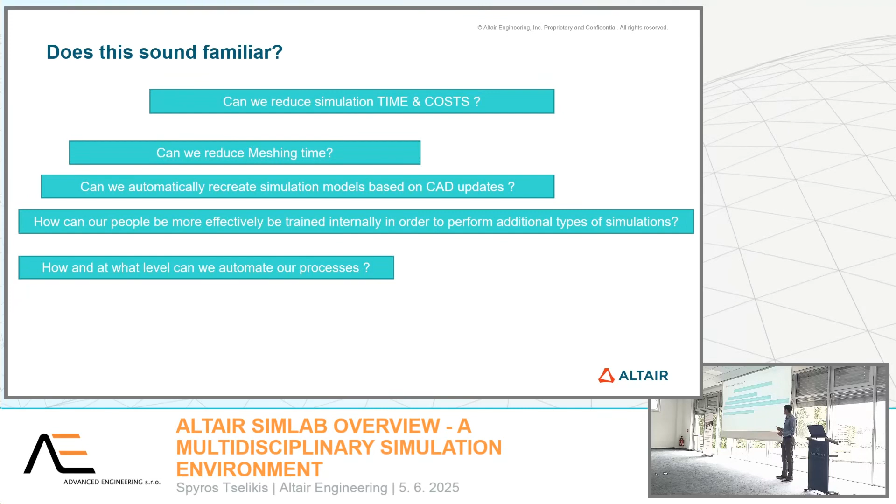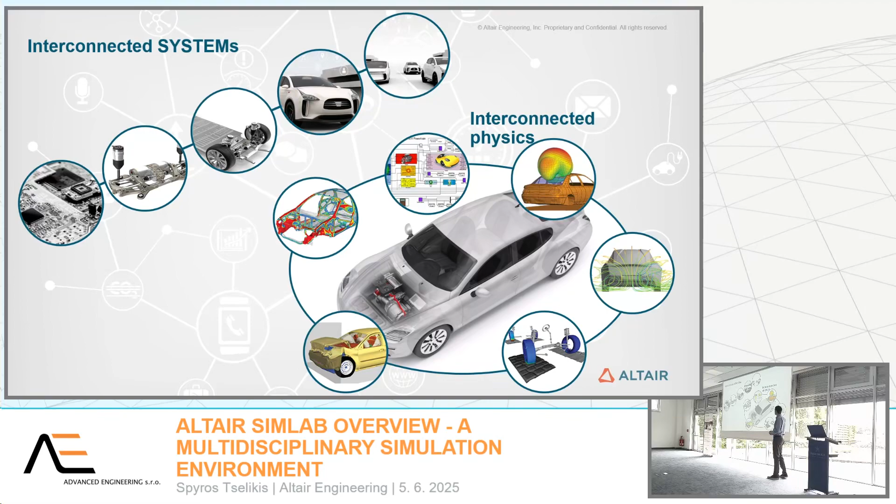So let's check the bigger picture of multi-physics. Today, the products are becoming more and more complicated, with interconnected systems which affect the performance of each other and have to be studied and analyzed individually. So in this system, not only systems are interconnected, but also physics, and all the multiple physics phenomena involved in a system have to be analyzed and studied in order for a complete understanding of the whole picture to be feasible. So let's look at some examples to see what exactly we are talking about.

First, let's consider this simple piping system where hot gas is inserted from the inlet at the top and runs through the pipes to the outlets at the left and right. There's a flange where it connects the two parts of the piping system, and also a weld placed at the T-junction of the system. And as you can see, in such a simplistic model, multiple physics are involved.

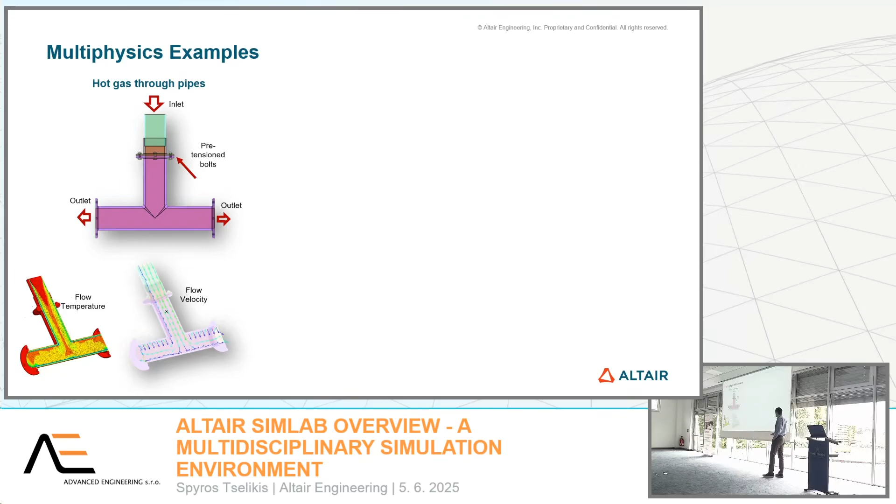So when it comes to this, an engineer has to calculate the flow temperature and the flow velocity and use them as input loads on the pipes, and based on those loads, the stresses can be calculated, and fatigue analysis on the piping system can be performed in order to evaluate the life of the piping system.

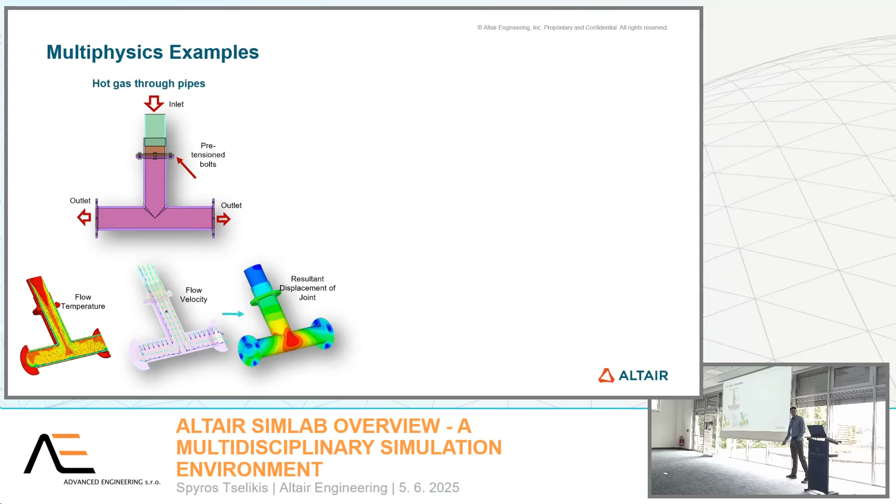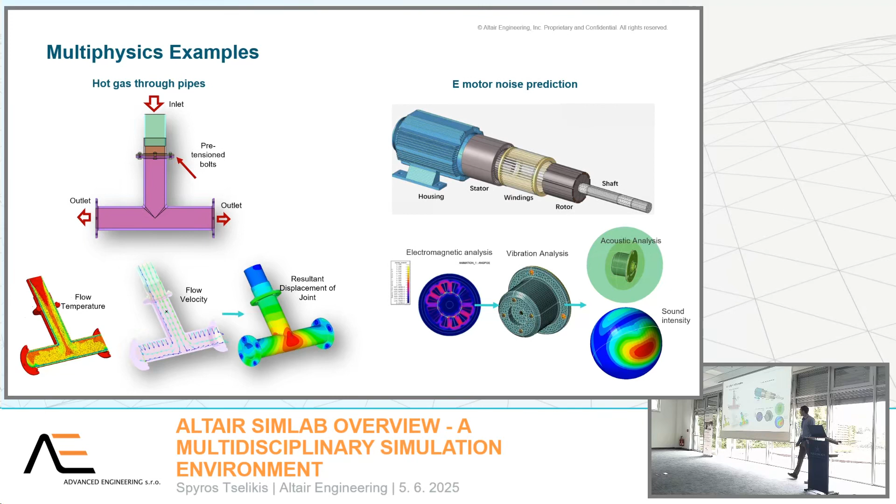And let's take an even more complicated example, closer to a real engineering use case. When it comes to an e-motor, an electromagnetic transient analysis is required in order to calculate all the forces in each tooth of the stator, which in turn can be used in a frequency response analysis. And based on this FRF analysis, acoustic responses far from the motor itself are calculated.

And let's check a real use case: the Nolato self-injector. We can see here the multidisciplinary development of the self-injector, which Nolato collaboratively developed with many companies, including Altair. The development cycle considers many aspects together, like the co-simulation of the injection process, the misuse in case of bending or opening of the loading tray, the manufacturability of the molded parts, and the optimization of the ribs.

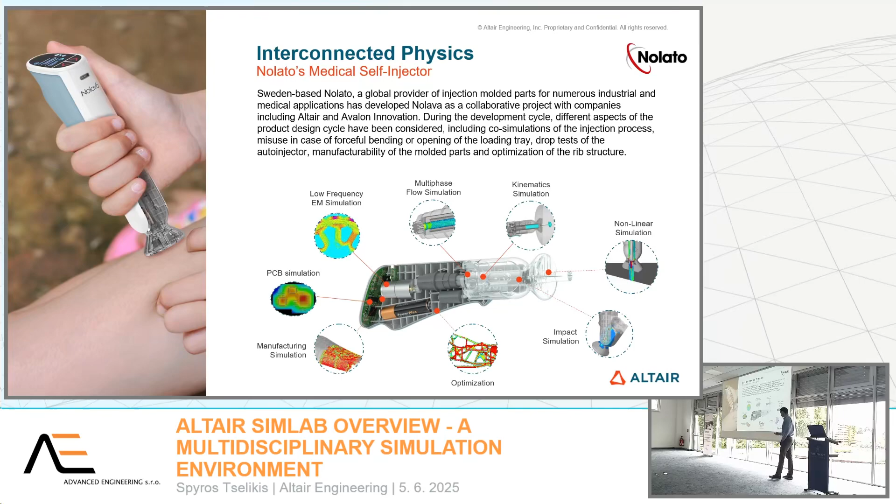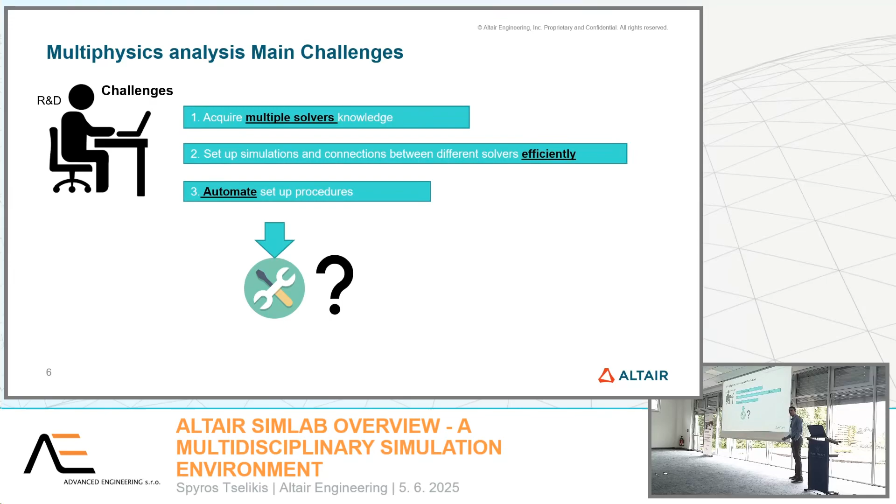So before we jump into SimLab, I want to summarize the main challenges while we are trying to tackle multi-physics analysis. First of all, we have to acquire multiple solvers, and we have to find an efficient way to connect them to each other. And of course, automate all these processes. So based upon these challenges, we have a pretty reasonable question: is there a tool that can help us overcome these challenges? And our answer to this is SimLab.

So if you wonder what SimLab is, it's a single multidisciplinary development environment. This means that it integrates pre-processing, solving, and post-processing in a single graphical user interface and enables us to easily and efficiently set up multiphysics analysis. SimLab was designed upon three main pillars: multiphysics support, user-friendliness, and automation. Each pillar is meant to help us overcome the previous challenges of multiphysics analysis. So from now on, we will try to explain each one of these pillars.

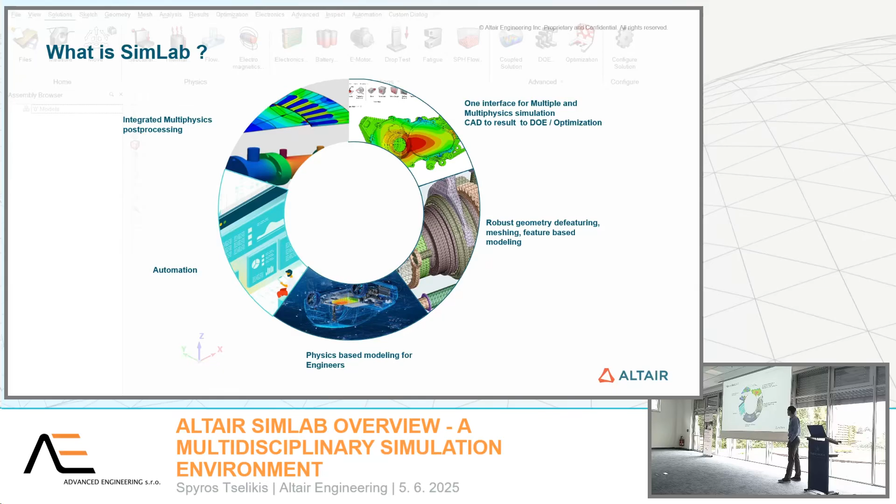First of all, let's begin with multiphysics support. When it comes to multiphysics, SimLab supports structural, CFD, thermal, electromagnetics, as well as coupling of those solutions. And upon that, we have implemented some dedicated tools that help us set up common use cases among the industries, like drop test, PCBs, thermal management, solder fatigue, e-motor acoustics, battery, and so on.

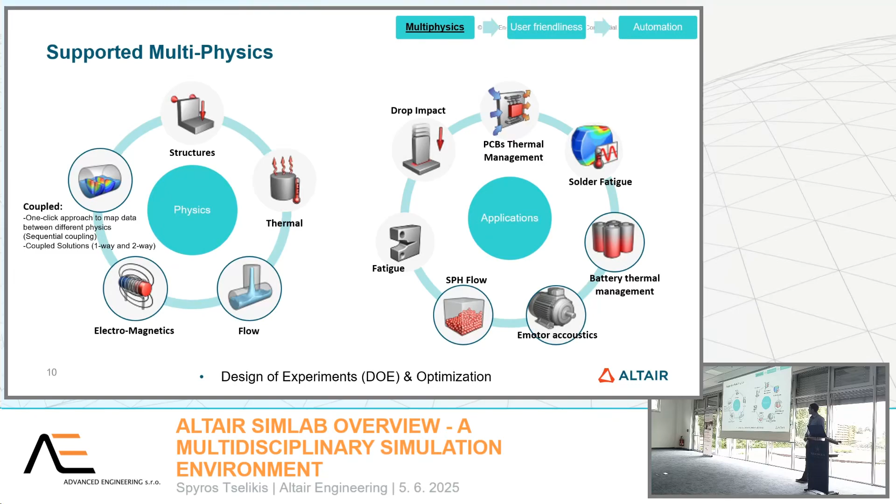Some typical application and simulation types for structural would be linear and non-linear static and dynamics, NVH, impact, durability, structural. For thermal, we have conduction, convection, and radiation. And of course, we can couple those two, structural and thermal.

For electromagnetics, as we saw, we have e-motors, PCBA reliability and electronic thermal management. And for fluids, we have fluid structural interaction, multi-phase flows optimization, and coupling with discrete element method softwares.

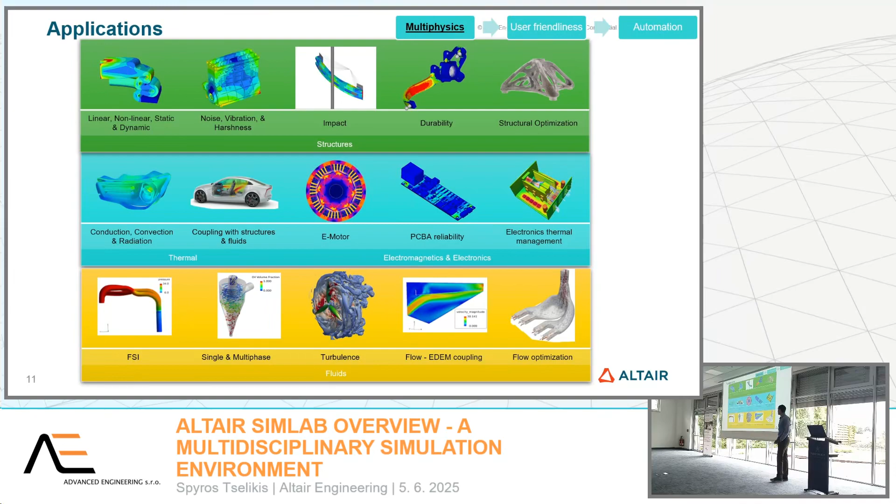And as Panos said, optimization has been a part of our DNA for around 35 years, so it would be unfair not to dedicate 2 slides to show you how you can use our optimization tools through SimLab. At a high level, we may say that in SimLab, we fully support 2 types of optimization: topology and shape optimization. And of course, as Panos indicated before, we have plenty more optimization tools in our portfolio.

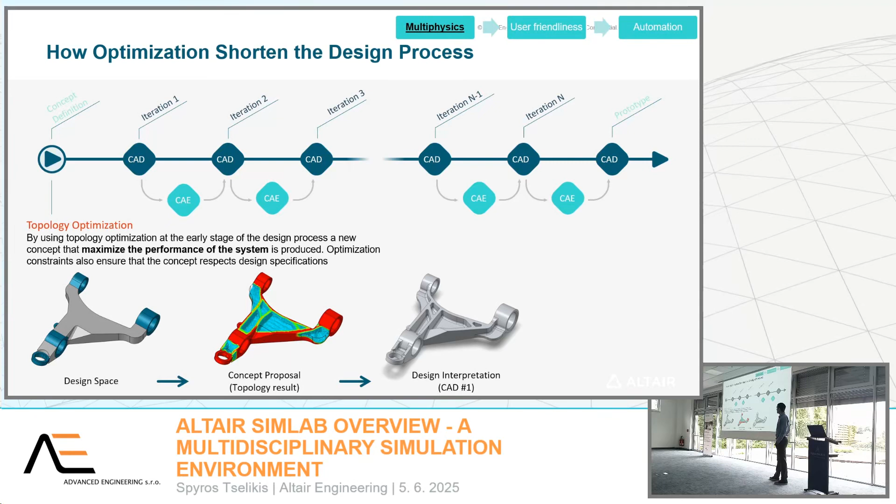To begin with, topology optimization helps us get a good idea about the optimal loading path and eliminate the unnecessary materials at areas that are out of our interest. And this can really reduce our development cycle and get a good performance and a good idea on a starting design. And of course, all of this topology optimization is fully supported in SimLab and can be very easily set up.

And for shape optimization, free shape optimization is a fine-tuning optimization algorithm and helps us get the right geometry and the right shape of our component. Here we see the component that was previously developed by topology optimization and how we can get the exact radius of the fillet in the area with the highest stress. Because when we try to optimize our component, we provide to the algorithm our criteria, such as reducing the stress peaks.

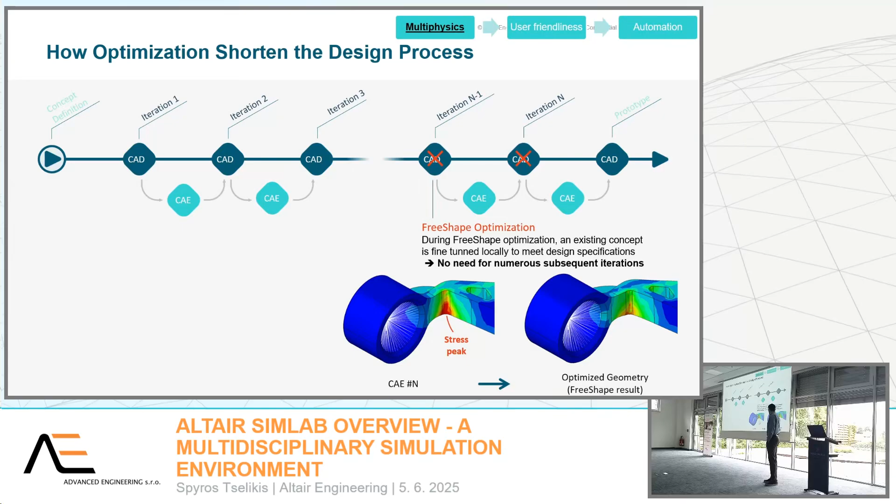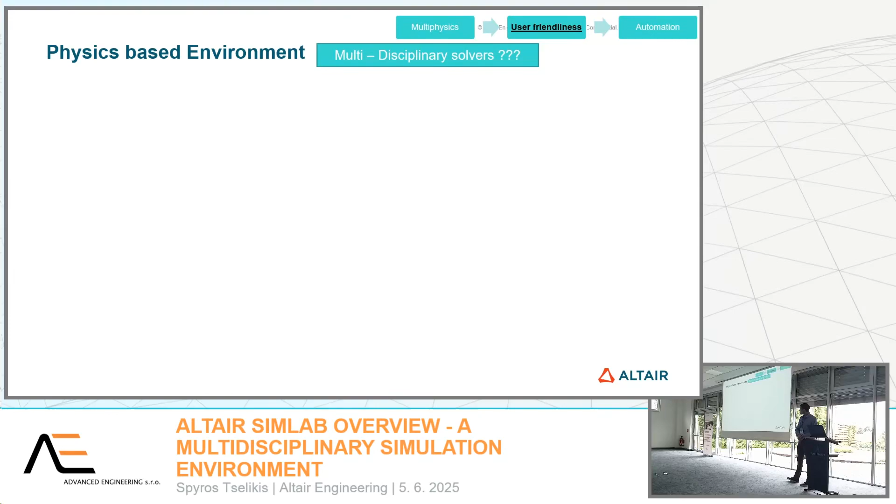Moving on to the second pillar of user-friendliness, in order to make it clear, I have to ask you this: is there a multiphysics solver? And of course, the answer is no. There are many solvers available when it comes to single physics problems. Like for structural, we can use OptiStruct, Nastran, Abaqus, ANSYS. For CFD, we have AcuSolve, OpenFOAM, nanoFluidX, ultraFluidX, Fluent, STAR-CCM+, etc. And for electromagnetics, we have FEKO, Flux, JMAG, and so on. I mean, there is a jungle of solvers out there.

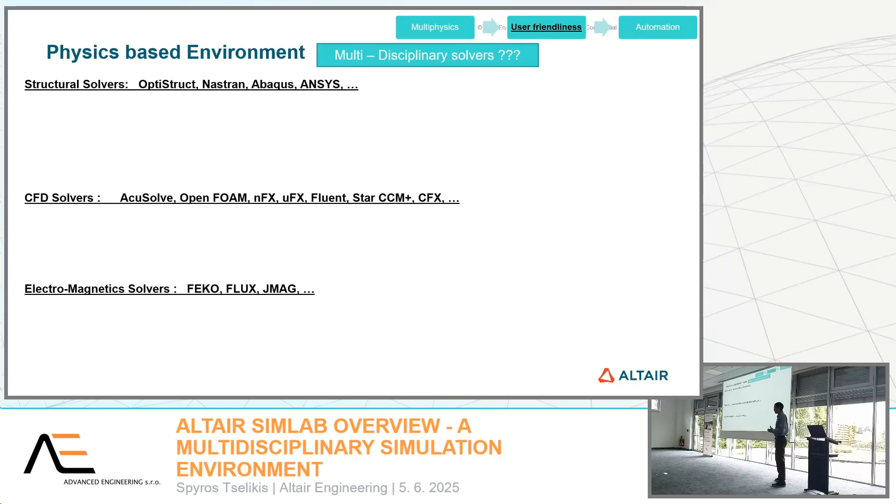There are millions of solvers, and as you know, it requires tremendous expertise and experience for us to know all the details and to master those solvers. So we can imagine how difficult it is to gain knowledge of multiple solvers. And this is the gap that SimLab comes to close, because SimLab is a physics-based platform. It uses physics-based toolbars, and this requires, I would say, zero knowledge about solvers, because we only have to understand the physical phenomenon and set up our analysis using our physics-based toolbars. And all the work and all the details from the solver are handled internally by SimLab.

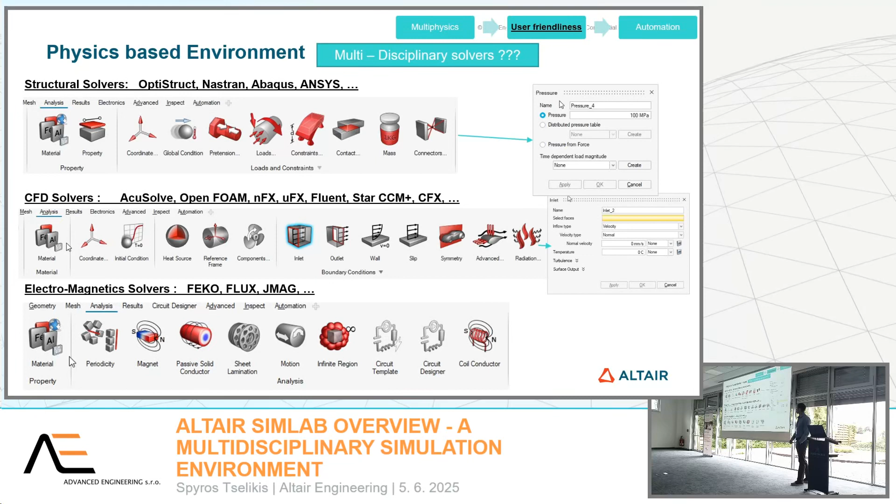And last but not least, the third pillar of automation provides several levels of automation. One can use pre-recorded scripts in order to rerun a model or set up a model, or use ready templates which help us with the assignment of mesh, material, and property parameters of the model. Of course, using our pre-recorded scripts or our templates enables users with no coding experience to automate their procedure. And of course, Python, for users with coding knowledge, can be fully utilized through SimLab, because it's the main scripting language, and helps us automate further based on our needs.

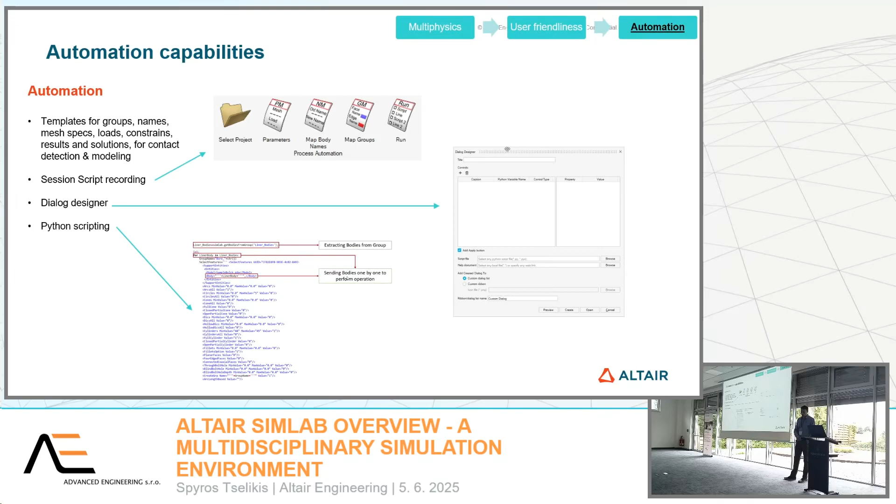So let me take you to this figure to exactly understand how important it is to invest our time to build a consistent and robust automation tool, because it can help us, as you see, reduce our time spent on multiple applications from weeks to days, or from weeks to hours.

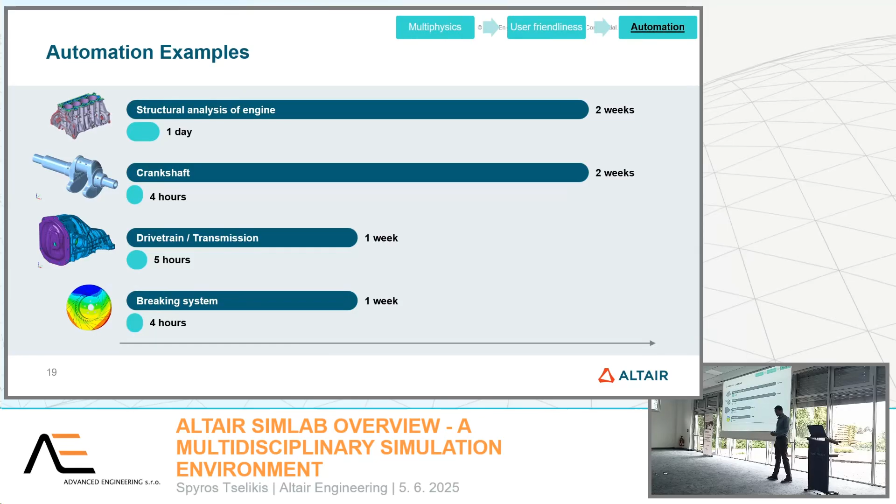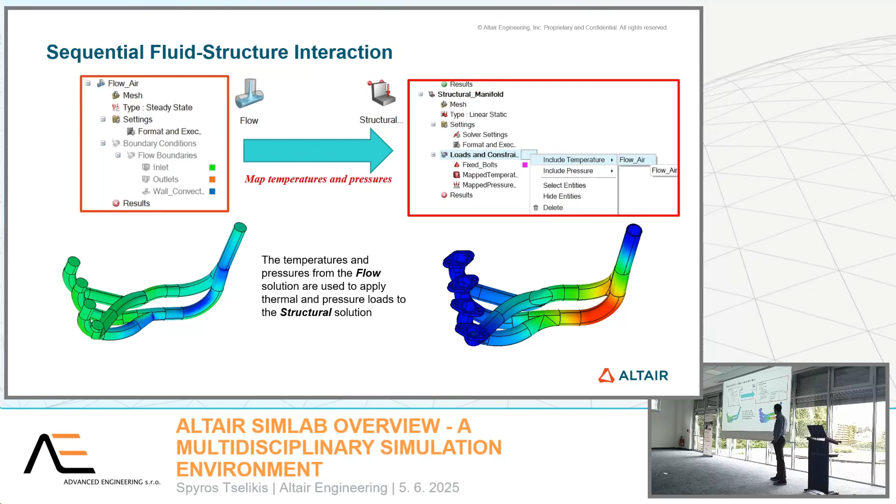So let's see some examples and some user stories in order to better understand the need for multiphysics analysis. In sequential FSI, we first perform a CFD analysis to compute the temperatures and the pressures of the flow, and we can easily use them as boundary conditions in the structural analysis in order to apply the thermal and the pressure loads.

FSI problems occur when a flow over a structure causes deformation, and this deformation influences the behavior of the flow. So in order to capture these complex phenomena, the two solvers, the flow solver and the structural solver, must be fully coupled by both running in tandem and exchanging data in real time.

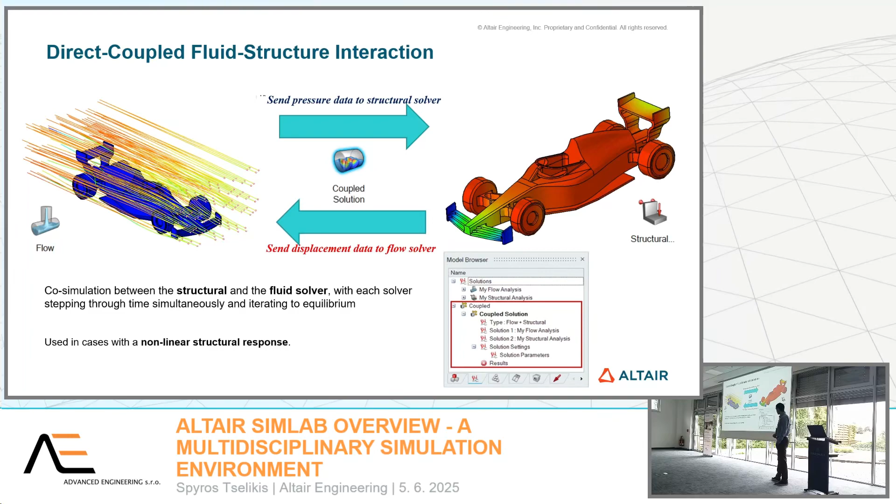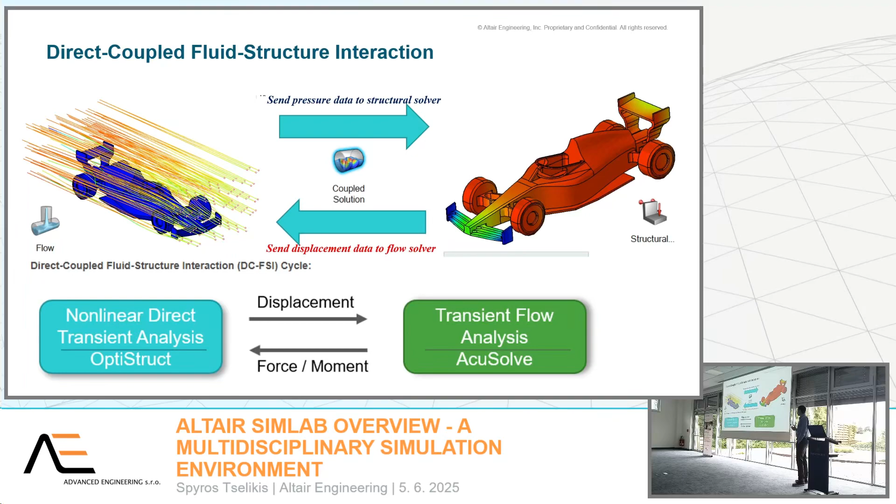So for this, AcuSolve, our flow solver, computes the forces and sends them to OptiStruct, and when OptiStruct computes the displacement, it sends them back to AcuSolve. And this happens multiple times at each time step without the need for the user to intervene. All these are handled by SimLab automatically.

Here we have the coupling of flow and discrete element method to model particle flow, multi-phase flows, and these applications are encountered in many industries like energy, oil and gas, mining, pharmaceuticals, and it's used for resolving inter-particle collisions, particle with equipment collisions, to track the particles alone or a set of particles, and compute the forces in each particle.

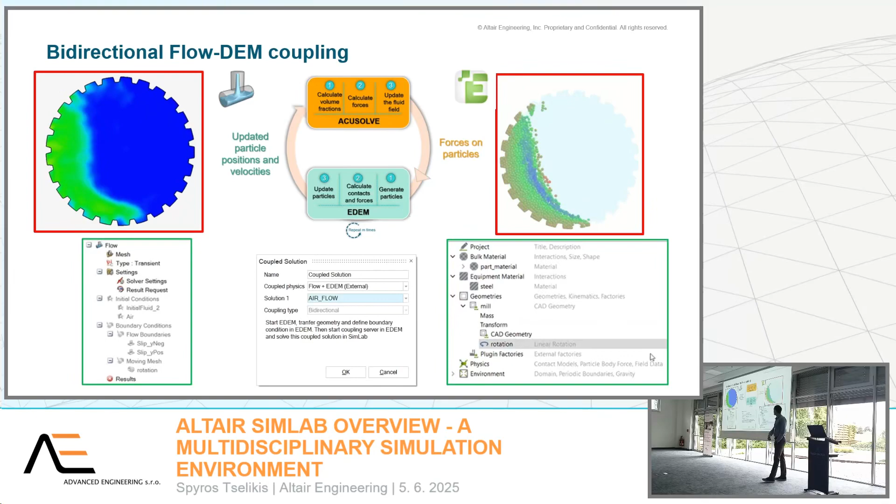For electromagnetics, SimLab core solutions offer a complete workflow from parametric sketch to setup solution and post-processing. As you know, in electrical machines, power losses act as heat sources in the thermal analysis. So the iron and the joule losses are computed by our electromagnetic solver, Flux, and provide these losses to AcuSolve

as heat sources. And of course, if we want to couple them in a two-way, as before in the direct FSI solution, AcuSolve again calculates the temperatures and sends them back to Flux in order to again compute the power losses.

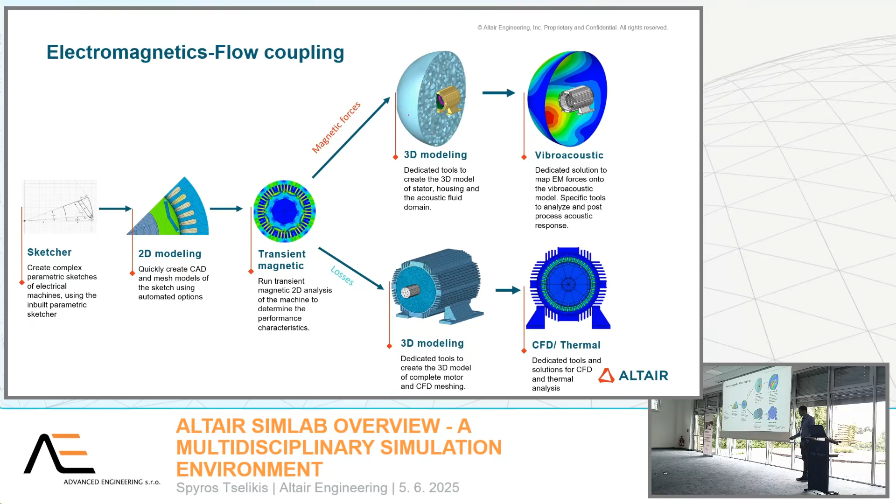Oops, this should be hidden. I'm sorry.

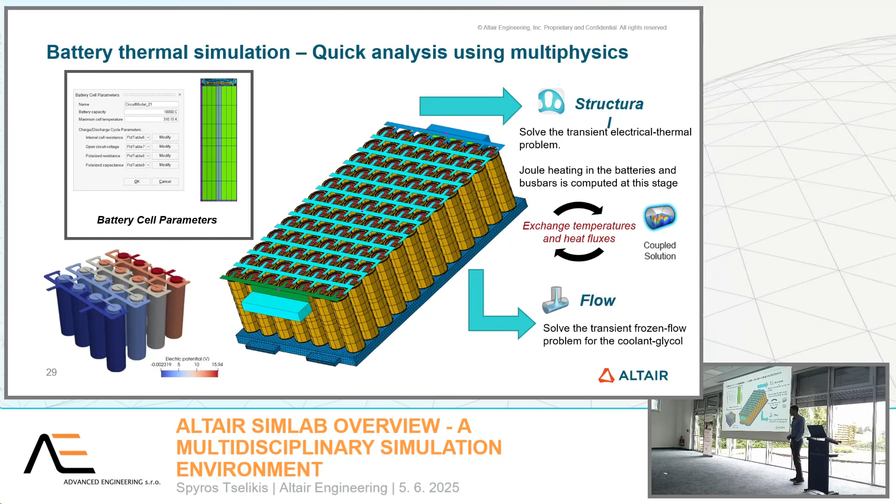So at last, a little bit of electronics. As Panos mentioned about batteries, we use OptiStruct in order to calculate the electrochemical reaction and the joule losses on the batteries and the busbars. And therefore, the thermal management of the batteries can be modeled with AcuSolve, by modeling the cooling effects through convection and FSI.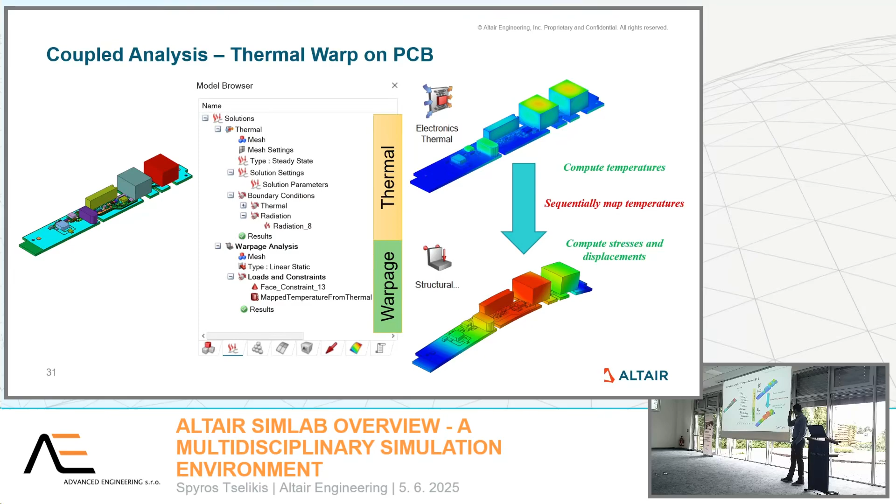In PCBs, the current that runs through the traces and the components generates heat, and this heat constantly increases the temperature of the component junction. And this phenomenon stabilizes when the heat transfer away from the component equals the power dissipation of the component. So it plays a crucial role to effectively track the cooling path of the flow, because if we do not have a clear image of the flow path, fatigue like warpage occurs.

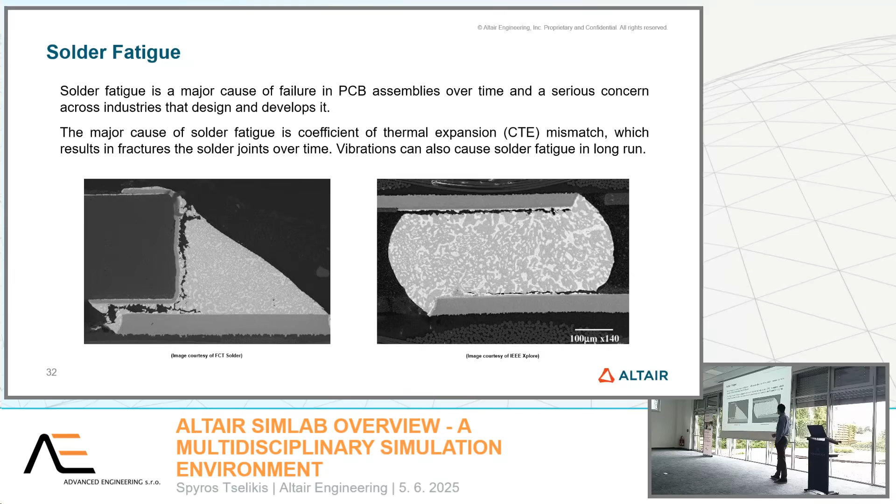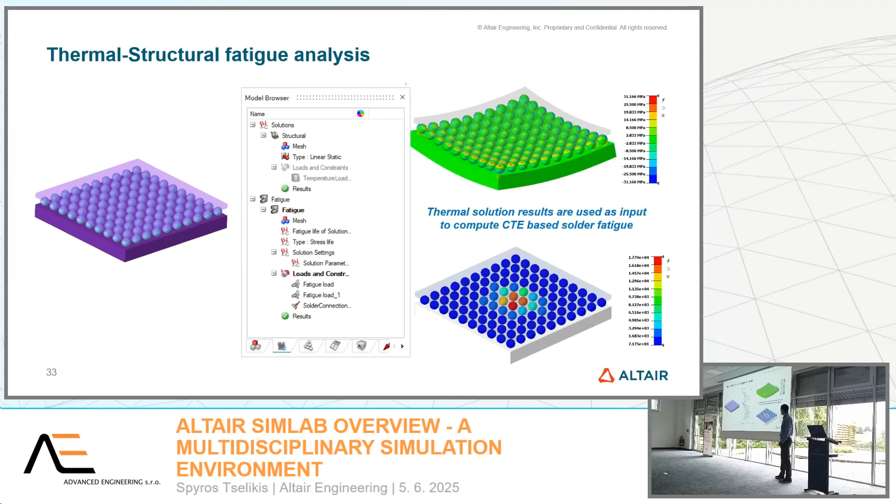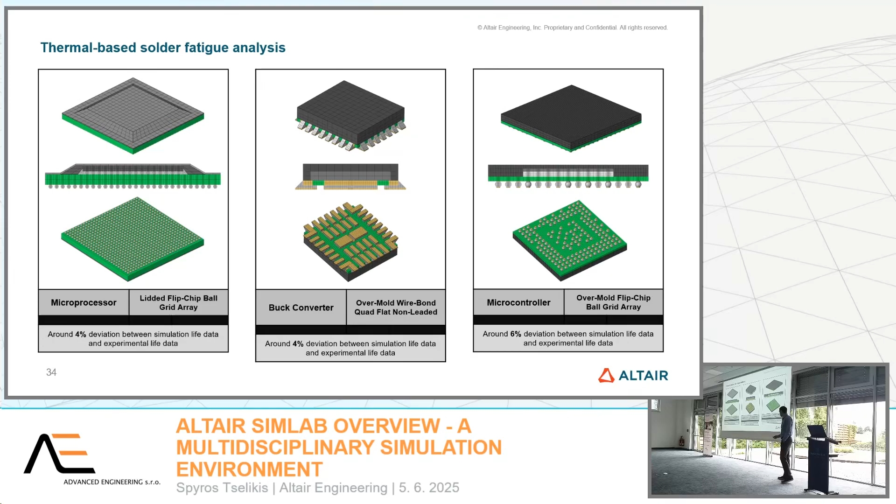And lastly, as nowadays everyone is interested in chips with all the fuss about machine learning, a very hot topic is solder fatigue, which is caused mainly by coefficient of thermal expansion mismatch and vibration of the chips. Thermal solder joint failure is the most common reason why electronics fail. So these tools help us automate the whole procedure and evaluate the life of the solders. And as you can see, these packages were simulated in SimLab within an hour, and they do not deviate much from experimental life data.

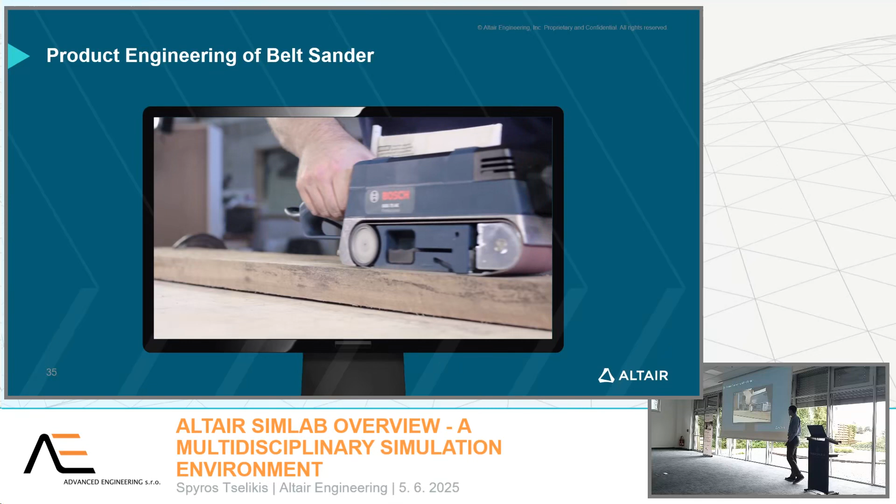And let me share with you some real use cases. This is a belt sander from Bosch. It consists of an e-motor which is moving the two drums, and in a constant loop over the drums, a sandpaper is mounted.

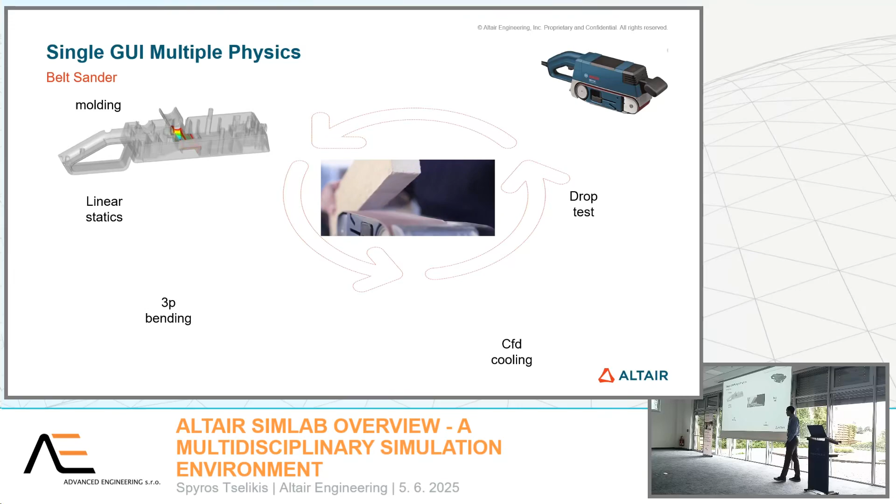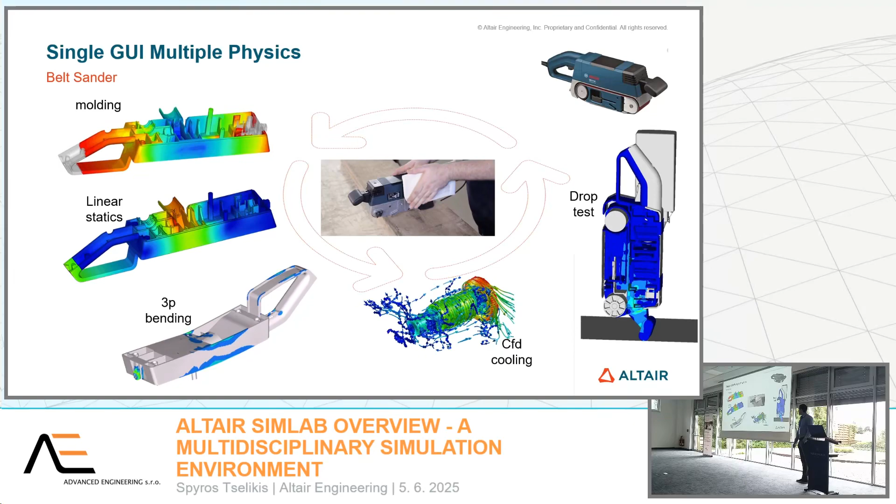And Bosch really achieved consistency and cost reduction using SimLab in many physical and manufacturability simulations, like injection molding of the plastic part, where we can see the filling, the packing, and the cooling, resulting in the short fiber orientation. We have a stress analysis, three-point bending, the cooling of the machine, and a drop test of the sander.

And another very interesting use case is the BMW crankshaft, which helped BMW to reduce the modeling time by 80% and eliminate all the user errors when it comes to manual work.

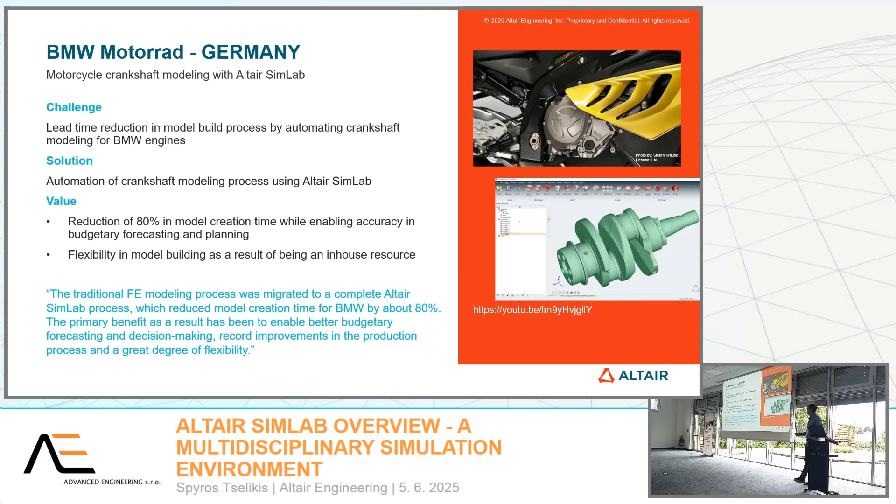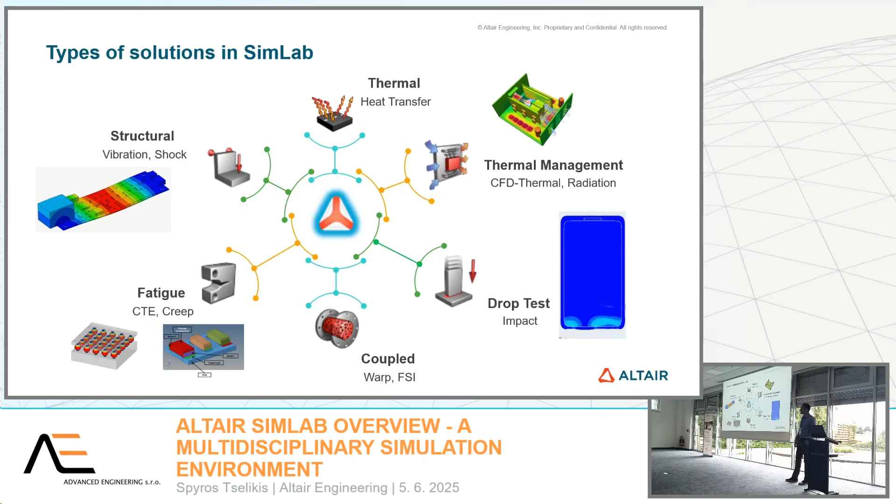So to summarize everything, I hope it's clear that SimLab is an environment for multiphysics analysis, but it's not only this. It can help us automate all our procedures and help us model complex components, because when SimLab was introduced it was widely known for its capability of tetrameshing and hexameshing.